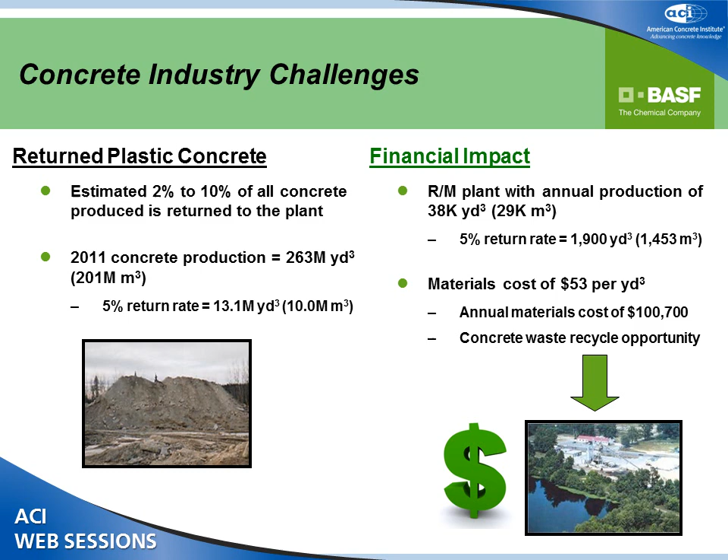Financially, and these are all numbers from the National Ready Mixed Concrete Association, typically for every plant there's roughly 40,000 cubic yards of concrete produced. So each one of these plants could have as many as 1,900 cubic yards of concrete coming back that they need to deal with. Not only is there the waste of the materials used to produce that concrete, at an average of $53 per yard, it's like $100,000 worth of materials being wasted. But also, that concrete has to go somewhere. The returned concrete gets reused, or it gets landfilled, and the producer needs to deal with that.

The other industry challenge is wash water. At the end of the day, when a truck needs to be washed out, as many as 225 gallons of water are used to clean the drum. That water hopefully finds its way into a recycling system, or in the olden days, hopefully not these days, into a pond on the plant. So again, that's a lot of water and residual material going to waste. The math of it is if a plant has 10 trucks and 240 working days, there's a disposal of 540,000 gallons of wash water they have to deal with, plus the residual waste in the wash water.

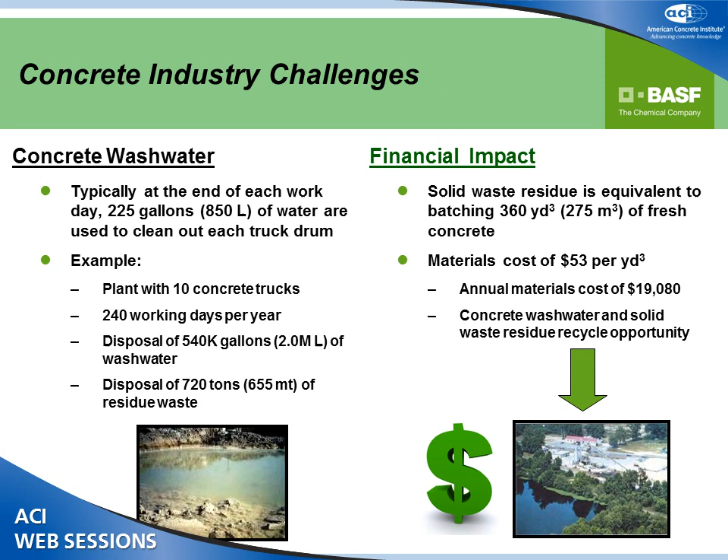The author goes through the analysis that the solid waste is the equivalent of batching 360 cubic yards of fresh concrete. Remember, $53 per cubic yard. So it's a material cost of $19,000 annually, but the wash water and solid waste is also a recycling opportunity. If you attend a lot of these sessions, you hear the word hydration controlling admixture a lot, because it finds its way into so many different applications. It was originally developed in the mid-'80s, so that's why the author mentions it's having some birthdays.

It was actually a concrete producer's idea that said, how can the industry help me, the chemical industry, help me get rid of some of this returned concrete or reuse it. And it basically stops the hydration of cement, whether it's in concrete or in wash water, until it needs to be and can be used again.

Over the years, it's morphed into a lot of different applications. I don't know if you were at this morning's session, they were talking about even in big structures like the World Trade Center, hydration controlling admixtures are finding their way into different types of concrete because it stops the hydration of these high performance mixes during delivery. But the primary original use for them was to stabilize returned concrete.

So the concrete comes back to the plant, it gets chemically stabilized, and then gets reused either that day or even as much as the next day, usually in lower specified concrete.

Also, the stabilization of wash water—you can take the wash water at the end of the day, wash your drum out, leave it in the drum if you want, treat it with a hydration controlling admixture, and then batch on top of it the next day, just cutting back on the amount of water you would have batched to compensate for the wash water.

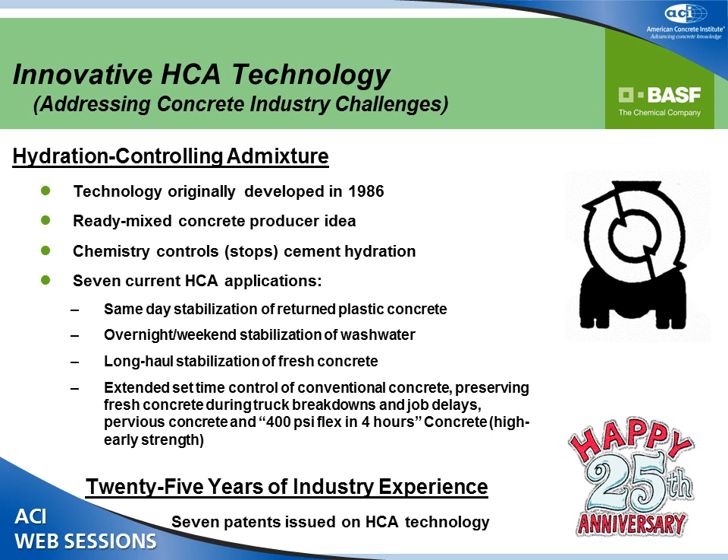So let's talk a little bit more about this and talk about why these technologies really are sustainable. Like Ketan was talking about in his presentation this morning, and some of the other presentations, you're going to see a lot more emphasis in the future about quantifying sustainability. Ketan talked about a life cycle analysis—we want to be able to quantify, we don't just want to say, oh, it's green. They may be intuitively green, but we want to make sure we can quantify it.

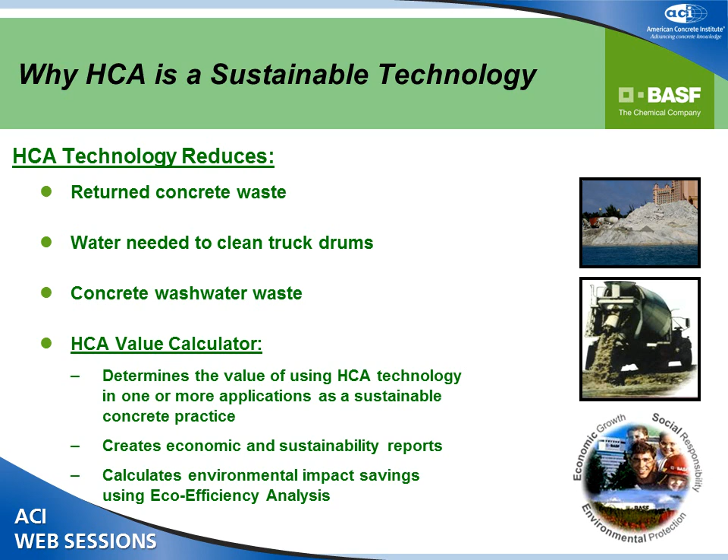So there's returned concrete waste, there's water needed to clean trucks, and wash water waste, and there's calculators to quantify these. As Ketan talked about, there's different protocols and different programs out there to measure the environmental impact, using the strategic life cycle analysis to compare, in this case, both the ecological and economic efficiencies of alternatives.

So it could be on a product like concrete, it could be on a process like making an admixture, or it can be on a technology like some of our other concretes. There's different ways to evaluate them, different protocols. ISO has a protocol, and as Ketan said, you can look at it from cradle to gate, cradle to grave, even cradle to cradle.

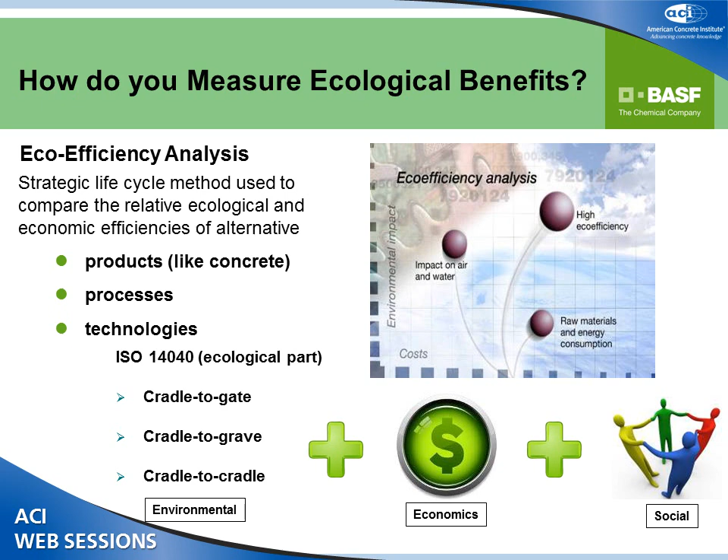But it's acceptable when doing that to take into account the three main pillars of sustainability, which are environmental, economics, and then social responsibility. Sometimes we want to do things because it's just the right social reason to do it.

The author will talk about measurements of environmental impact, and the eco-efficiency analysis he's using measures six different environmental impact areas. Typically, when we hear about environmental impact, we hear two things: embodied energy and CO2 emissions. These new protocols are measuring so much more than just that.

In this case, there are six different impact areas, with the first being consumption of energy, and the second being emissions—but much further than just CO2 emissions. There's air emissions, water emissions, solid emissions, and under air emissions there are four categories: global warming potential, ozone depletion potential, photochemical ozone creation potential, and acidification potential. So it's a very rigorous investigation.

Also, toxicity potential, which is the effect on human health—do any of these products or systems hurt our community or our people? Then risk potential: beyond toxicity, is there any physical hazard? Is the mining, developing, and creating of these products high risk physically from accidents or disease? That can be measured. And then consumption of raw materials—are the materials being used renewable, or are they not renewable?

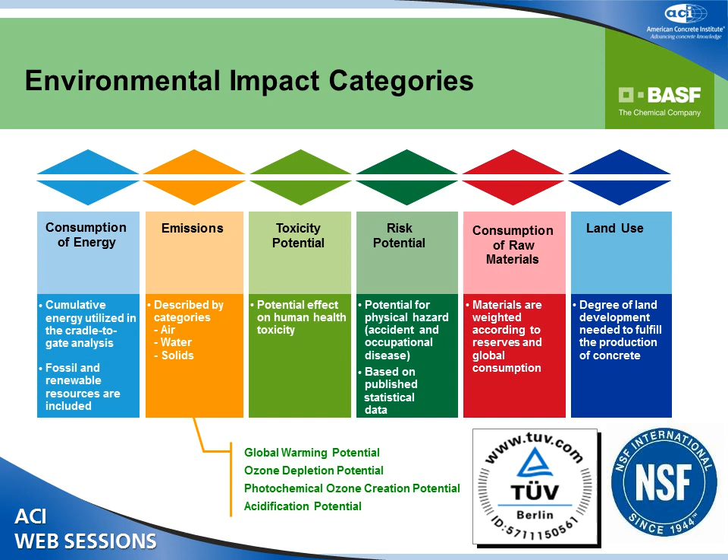In this case, the author is using an eco-efficiency analysis to evaluate hydration controlling admixtures. This is a cradle-to-gate analysis, so it considers all the ingredients from the time they are mined, whether it's cement, aggregates, admixtures, water, or recycled materials, how the materials are acquired, and then how they are transported and how they affect the mix design.

But because it's cradle to gate, it stops at the production of concrete. It doesn't matter, it assumes everything else is the same, that the concrete plants are the same, and that the delivery vehicles are all the same. So it stops at the production of concrete.

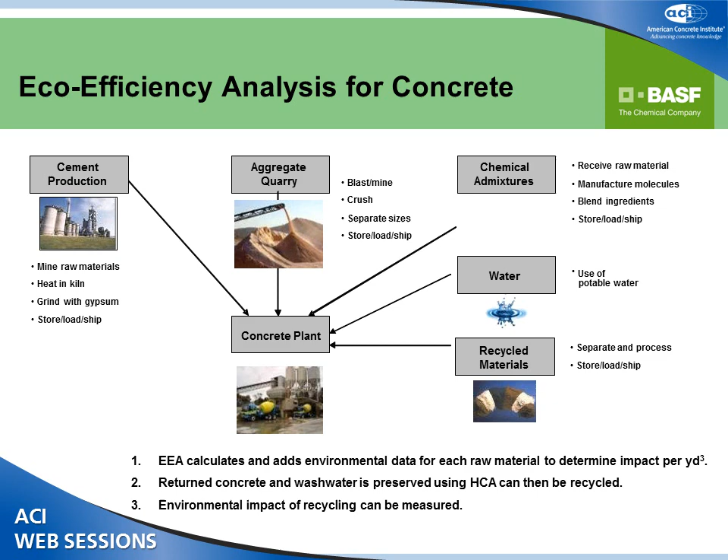Some of the analysis the author does is, first of all, same-day concrete stabilization. This is where hydration control technology stops the hydration for 30 minutes to 4 hours, and then fresh concrete is batched on top of it, and then it is delivered in non-critical project applications.

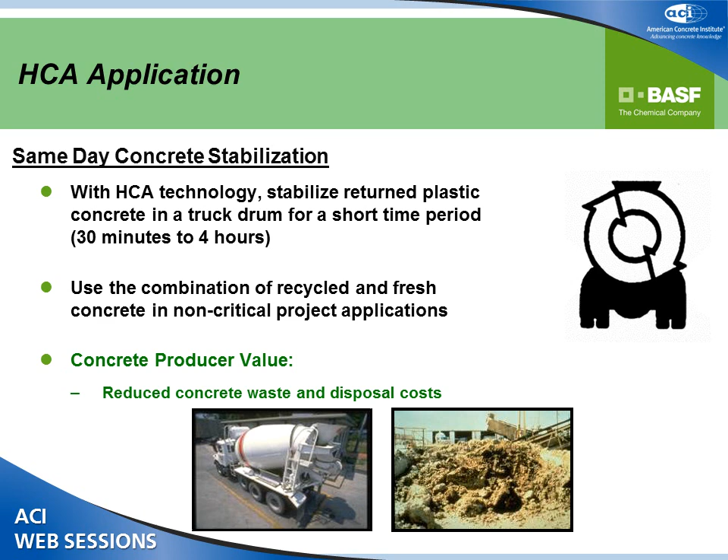But if you look at the environmental impact, there's the ability to reuse this material. If you do a life cycle analysis of this material in the same-day stabilization, you show the environmental savings as opposed to the economical savings.

The eco-efficiency analysis that the author is using does both a quantitative measurement as well as a practical equivalent. What I mean is, for instance, they'll say it's this many kilowatts, a direct quantification of X amount of kilowatts of savings, and then they'll compare it to something practical that maybe means more to us.

For example, in this case of reusing these 40,000 cubic yards of concrete, the author is saying there's an environmental impact savings of 1.2 million kilowatts because we're reusing the concrete. Don't forget, it's measuring the concrete all the way back to the mining of its ingredients. So in this case, 1.2 million kilowatts of energy savings is the equivalent of powering 108 U.S. houses for a year, giving a practical idea of how much the annual savings are.

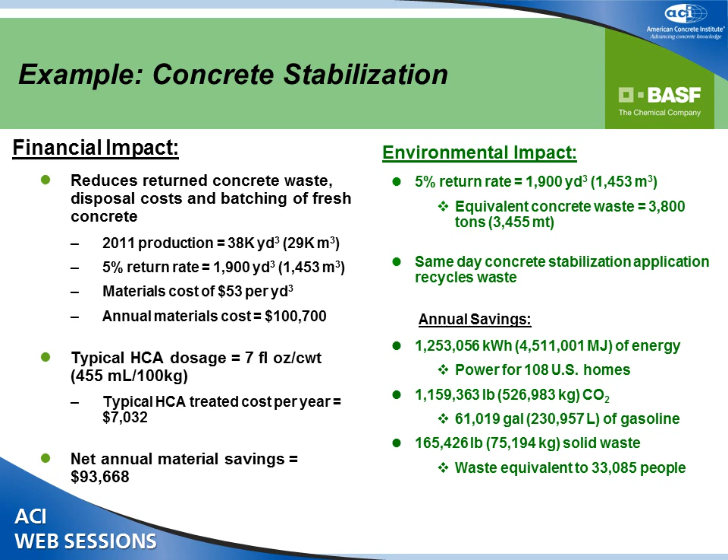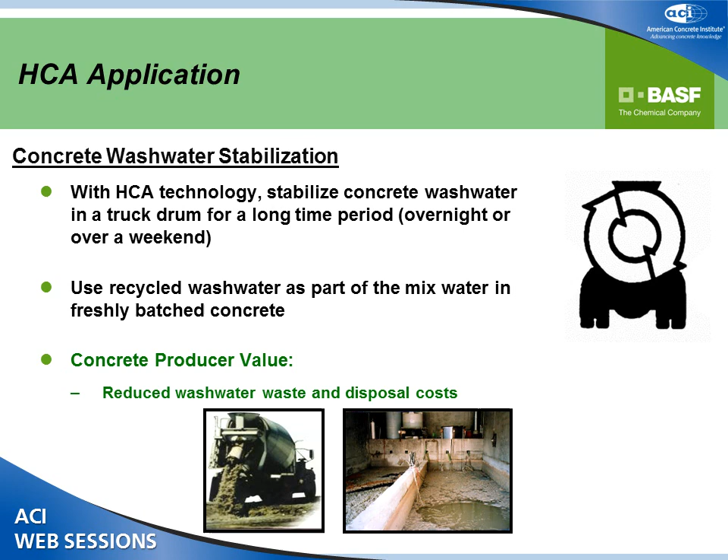With concrete washwater, it's theoretically a similar concept, in that with the hydration control admixture, the water comes back at the end of the day. They wash out the truck, keep the water in the truck, and it's reused as part of the mix water the next day. The producer sees an ecological and economical impact in doing this, a positive one.

The numbers I showed you earlier were 10 trucks and 225 gallons. So a material cost to the producer of $19,000, it would cost about $8,000 to treat all those, and then savings of about $10,000.

Through the eco-efficiency analysis, an environmental impact is calculated. In this case, using the same 10 trucks, 540,000 gallons of water, and 720 tons of waste in the wash water, they're able to calculate the annual water savings.

In this case, the amount of savings is the equivalent of washing out 1,867 truck drums. Here's the practical equivalent: it's the same as taking almost 38,000 showers, or almost the same as 3.6 million half-liter bottles of drinking water.

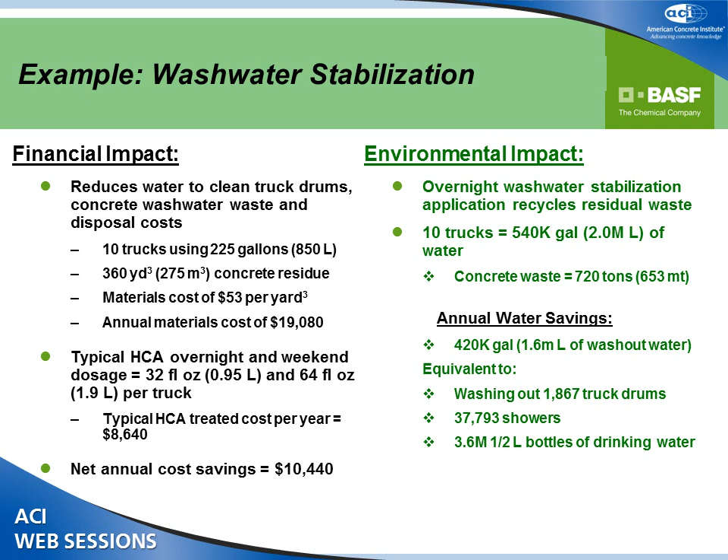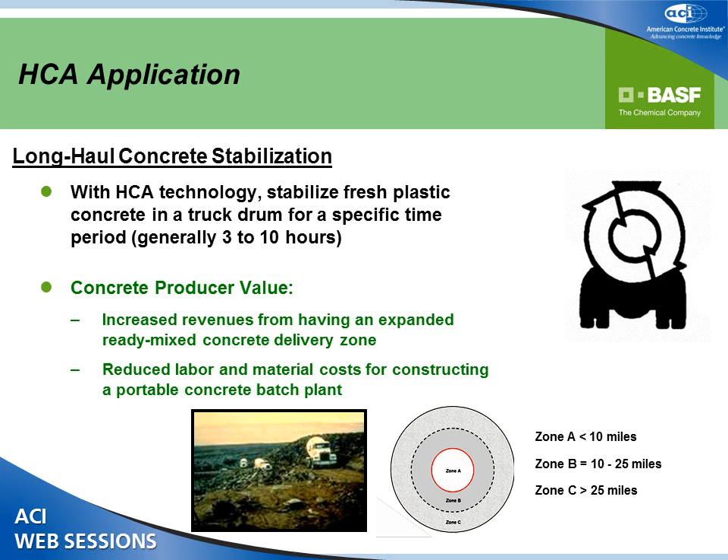Other applications include long haul, where they can extend the delivery time up to 3 to 10 hours, such as trucks traveling through the Mojave Desert. The concrete producer can travel into much wider zones, increasing his position by expanding his market delivery zone, and saving on any labor and material costs for constructing portable plants that they might have to do as an alternative.

They use it in pervious concrete because pervious concrete is such a stiff mix that upon delivery it would actually start to hydrate. So you stop the hydration upon delivery, and then once it gets delivered, it starts setting up as normal.

It's also used in applications, for instance, when they're pumping concrete long distances underground for mines. You stop the hydration, because the last thing you want is for the concrete to set up in a pipeline in a mining situation.

And then there's a whole technology about really high early strength concrete, and if you want to learn more about it, you can read our new ACI 212 committee document on state of the art. We have a whole new chapter on that.

The concept is that very high early strength concretes are being made, usually used for full depth repair applications of highways. For example, in about a 24-hour time period, you can come in, remove a highway panel, and do a full depth repair.

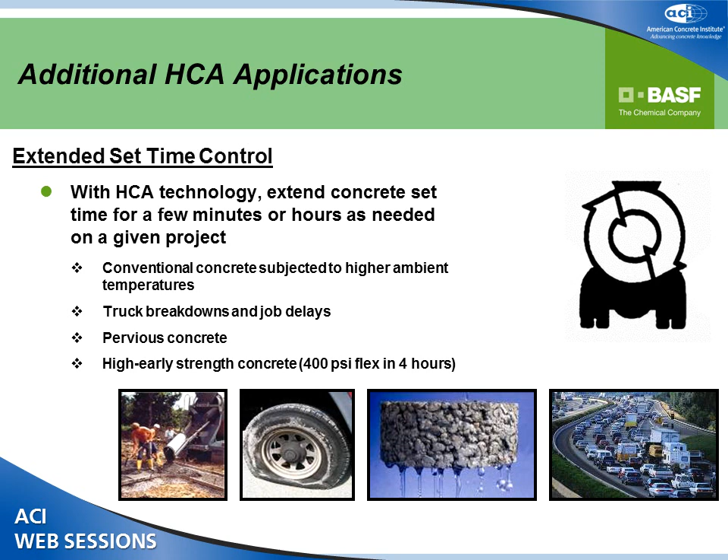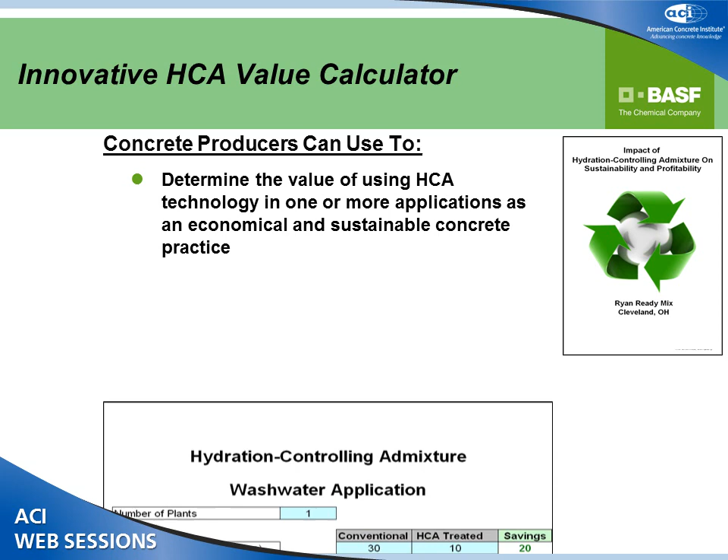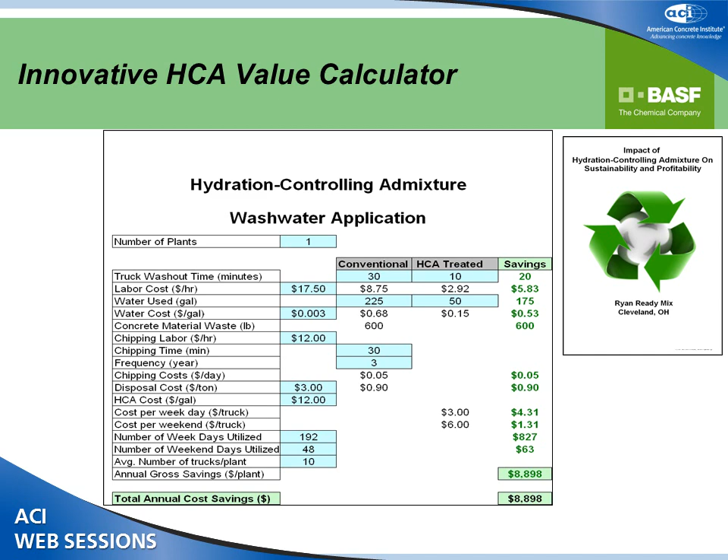The example of some of the calculations, part of it's economic and part of it's environmental. So if you go through those examples we just talked about, you can do an analysis of the annual cost savings, whether it's based on truck washout time, labor costs, amount of water, and a whole list of things you can compare when comparing conventional concrete to hydration controlling admixtures.

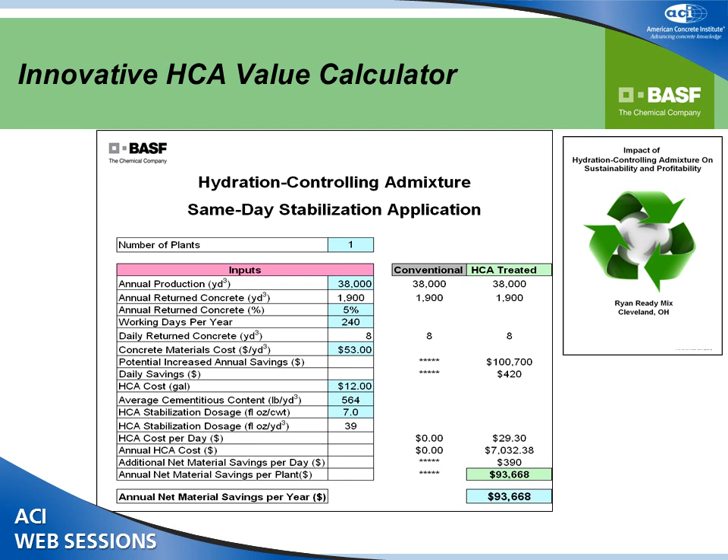And so there are tools to do those calculations. There are also tools for eco-efficiency analysis to do overall calculations of the total environmental impact of these types of systems. In this case, what you're seeing are some of the actual outputs of the example that we showed.

It was similar to what Caitlin was talking about earlier. Energy, raw material use, fossil fuel consumption, global warming potential, photochemical ozone creation potential which is smog, acidification potential which is acid rain, water emissions, solid waste, and land use.

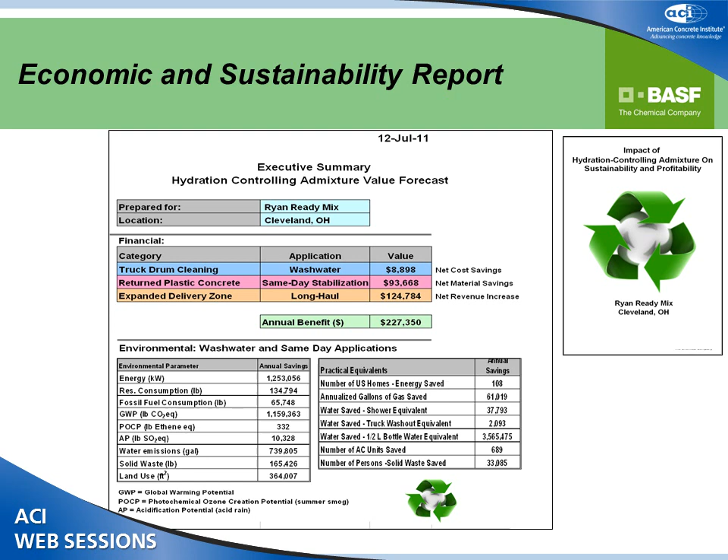The takeaway messages from the author are that hydration controlling admixtures control cement hydration, which allows the recycling of concrete and wash water. There are seven applications for concrete producers that we've talked about, and there's 25 years of industry experience, so it's a very used and understood material.

There are calculators that can determine the economic and sustainability impact of these types of materials, and these are materials that help concrete producers manage their concrete and wash water waste streams and increase plant operational efficiencies. So that's it. Do you have any questions?

In one of the slides you have 400 psi, I think you said 4,000 psi. Oh, I'm sorry. Okay, but what about shrinkage? Do you have some problem with shrinkage or cracking in this slab because of the really very high early strength? Yes, good question, and thank you for correcting me.